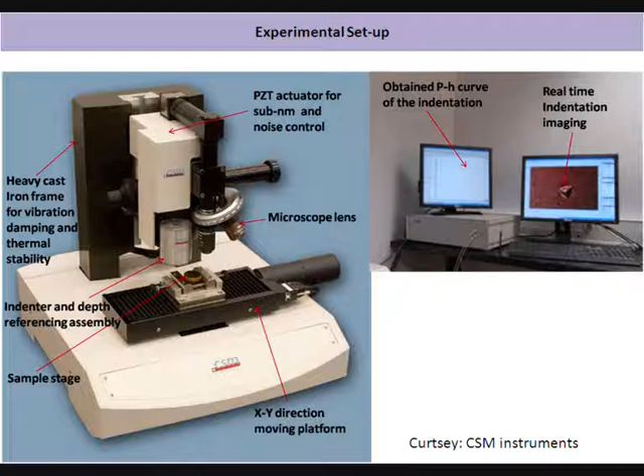This is the experimental setup of the instrumented nano indentation test. These are the various mechanical properties which can be measured using nano indentation. Some of the properties are hardness, Young's modulus, fatigue, fracture toughness, elastic and plastic work. We can also do the modulus mapping of the specimen, like how the elastic modulus changes from one place to another in the samples. Also, we can do the nano scratching on the thin films or coatings.

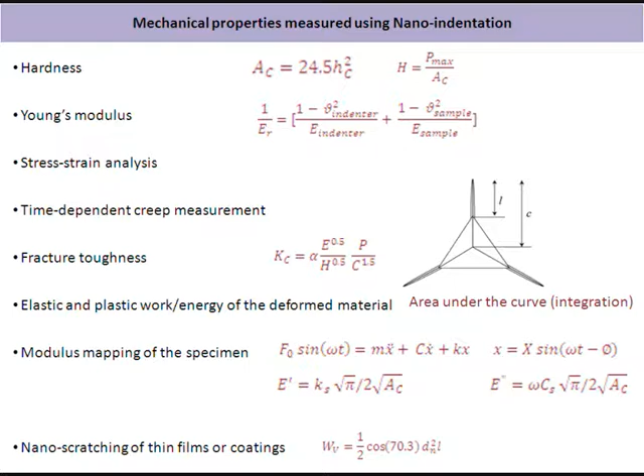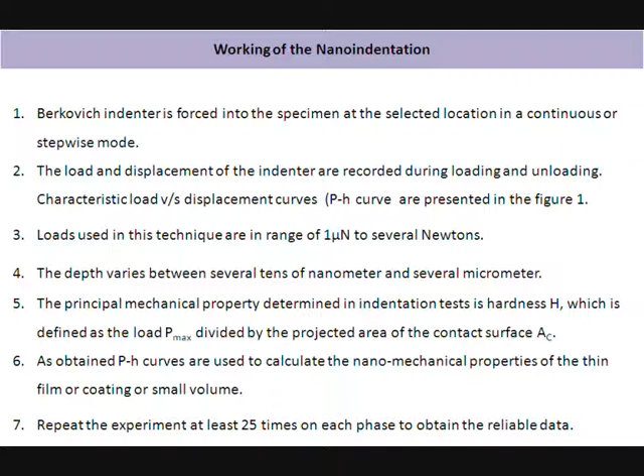The working of the nano indentation is as follows. First, Berkovich indenter is forced into the specimen at the selected location in a continuous or stepwise mode. The load and displacement of the indenter are recorded during the loading and unloading. Schematic of the whole experiment is presented in this slide. The indenter is pressed against the material. After attaining the maximum load, the indenter is held at this load for 2 to 3 seconds, so that material can recover their properties, and we can avoid the thermal drift and inertia.

After that, the indenter is reverted back, and during this unloading period, this is purely the elastic recovery phase, and after that we can observe a small impression on the material surface, which we can later on see on a spatially resolved basis using AFM or other techniques like profilometers.

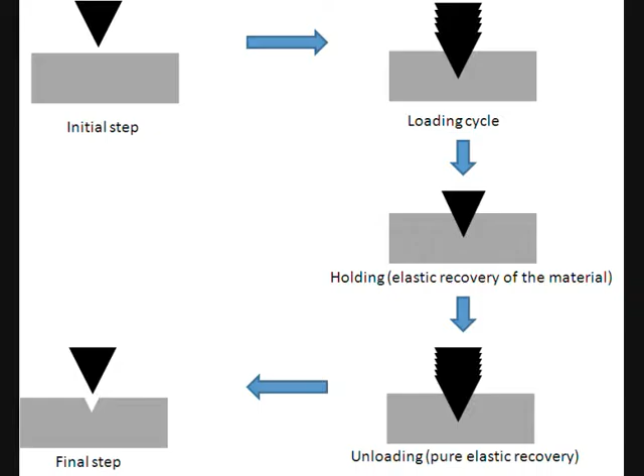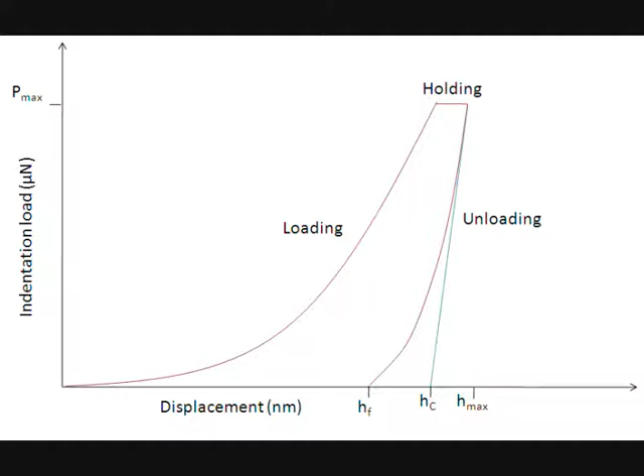The characteristic load versus displacement curve is shown. Loads used in this technique are in the range of 1 micronewton to several newtons. The depth varies between several tens of nanometers and several micrometers. This is the typical load versus displacement curve. During the loading phase, load increases with time, and after attaining the maximum load, holding is done, and after holding, unloading is done, and we can measure the reduced modulus by drawing a tangent on the initial portion of the unloading curve.

These are the results. Ultra high molecular weight polyethylene based composites are used for the study. Ultra high molecular weight polyethylene has been chosen as a reference material, and these are the typical load versus displacement curves obtained for ultra high molecular weight polyethylene. Here we can see that the maximum attained load is around 16 micronewtons, and the maximum displacement is around 75 nanometers.

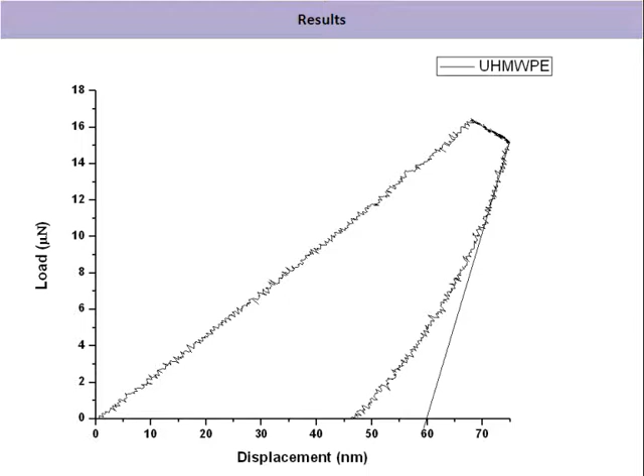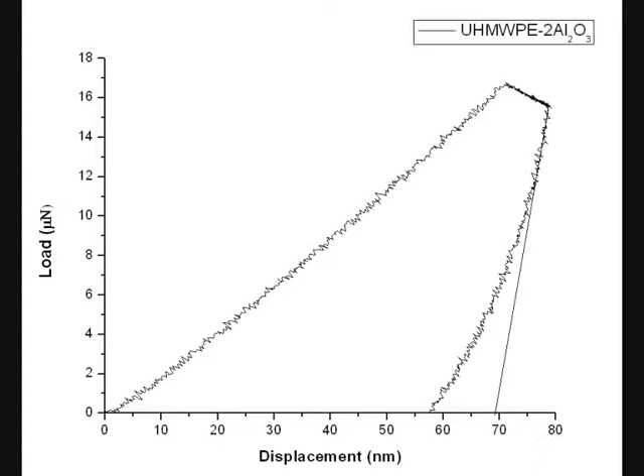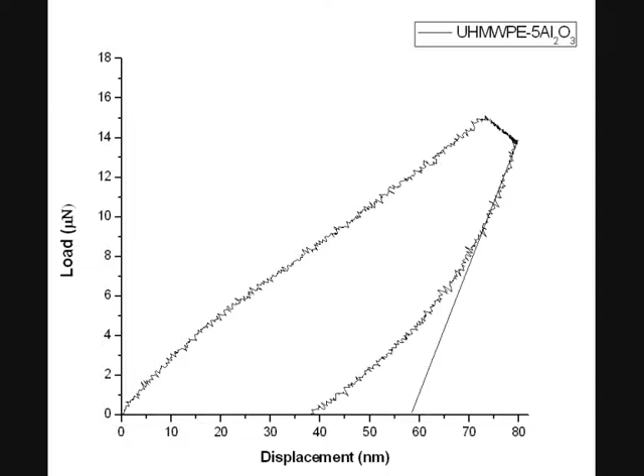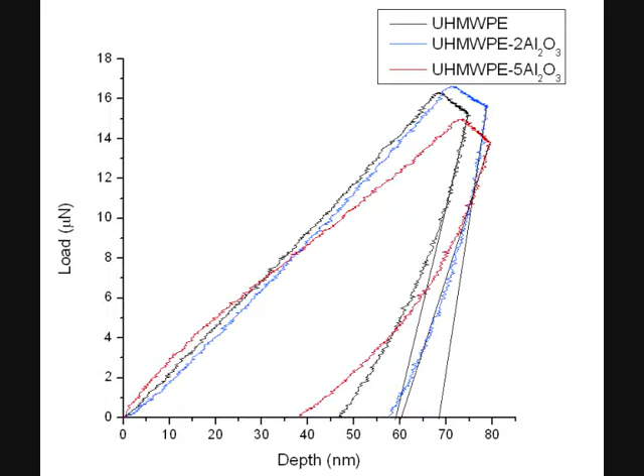Here we can clearly see that the residual depth is least in the case of ultra high molecular weight polyethylene 5% aluminium oxide, while it is greatest in case of ultra high molecular weight polyethylene 2% aluminium oxide. On the basis of these nano indentation curves, we can infer that 5 wt% addition of aluminium oxide increases the hardness of the material up to 79 MPa, and the minimum indentation depth is around 64 nanometers.

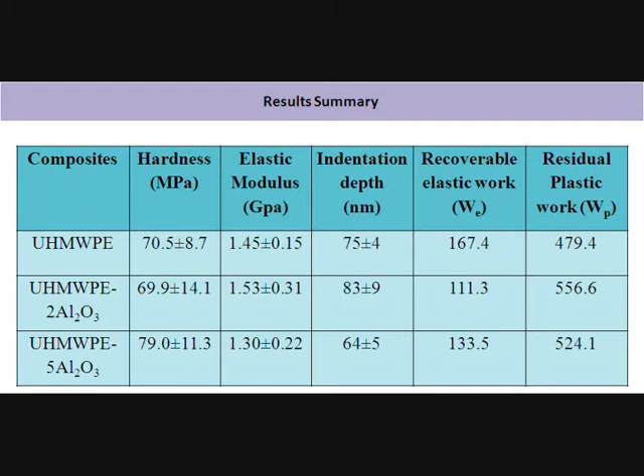These results illustrate that the 5 wt% aluminium oxide composite shows better mechanical properties than ultra high molecular weight polyethylene, and the measured properties of ultra high molecular weight polyethylene 2% aluminum oxide are inferior to ultra high molecular weight polyethylene. It clearly indicates that addition of 5 wt% aluminum oxide or greater increases the mechanical properties, while a small amount of aluminum oxide addition does not improve the mechanical properties of polymer based composites. Thank you.